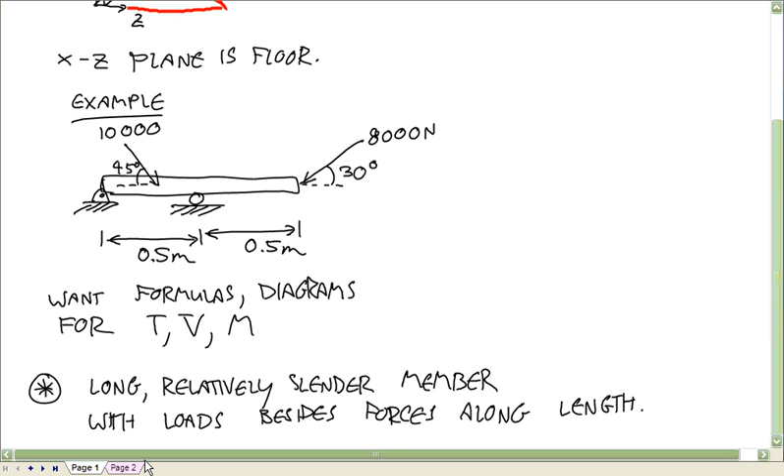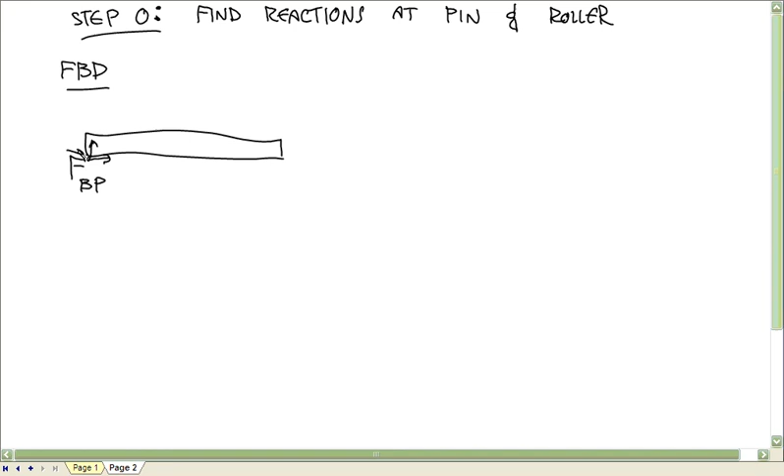Okay, so free body diagram of the beam. We'll put a force here. I'll call it force on the beam by the pin. And then there's a force here. I'll call it R. Then if you break this force into components, you get 7071, negative 7071.

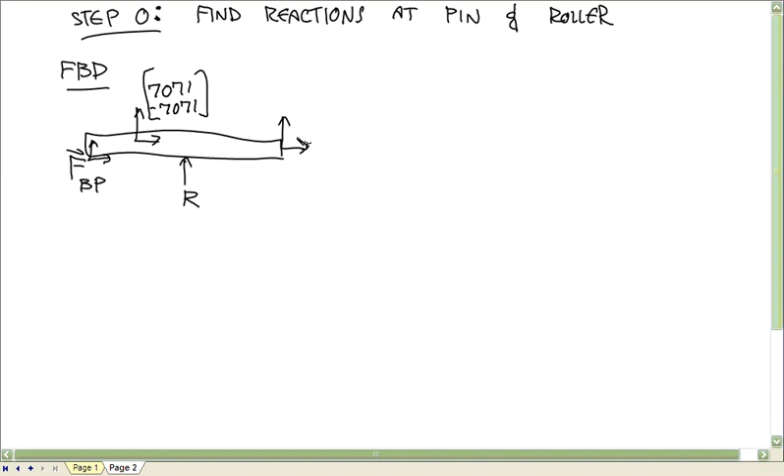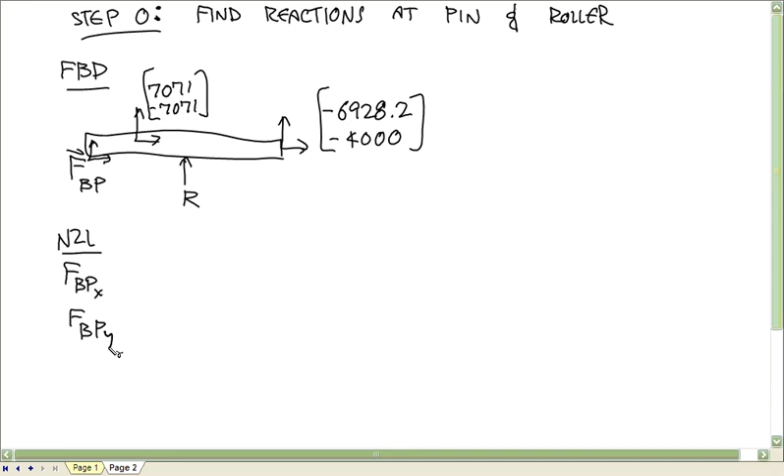And break this force into components, you get negative 6928.2, negative 4,000, right? So then Newton's second law, we have F BP x and y, plus 7071, negative 7071, plus 0, R, plus negative 6928.2, negative 4,000. That's equal to zeros.

And the rotational equation, I'll do this about the pin. So you could set up the table for this, but I think you'll find with almost all of these beam problems, calculating those moments comes out pretty simply. Since these are always straight lines, for the most part the x components are going to be acting along the line horizontal from what you're choosing as your about point. You're just going to have moments produced by those vertical forces. So writing those tables out for these beam problems and internal load problems probably won't be necessary.

So you got negative 0.25, that's the moment arm, times 7071. Well, the moment arm's 0.25. I guess I just pulled this negative out here. Really, the way you have to think about this is in terms of which way this would cause a rotation about what you choose as your about point. I chose this pin as my about point. So a downward force is going to make it rotate clockwise. And of course, when I do something clockwise to me, it looks counterclockwise to you, making everything more confusing.

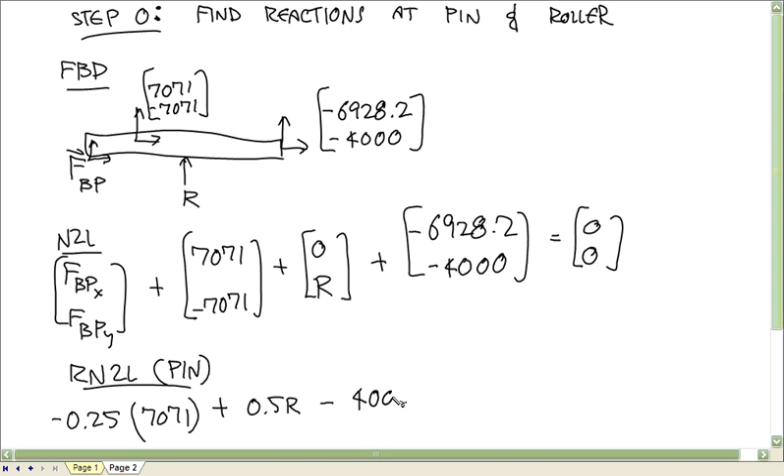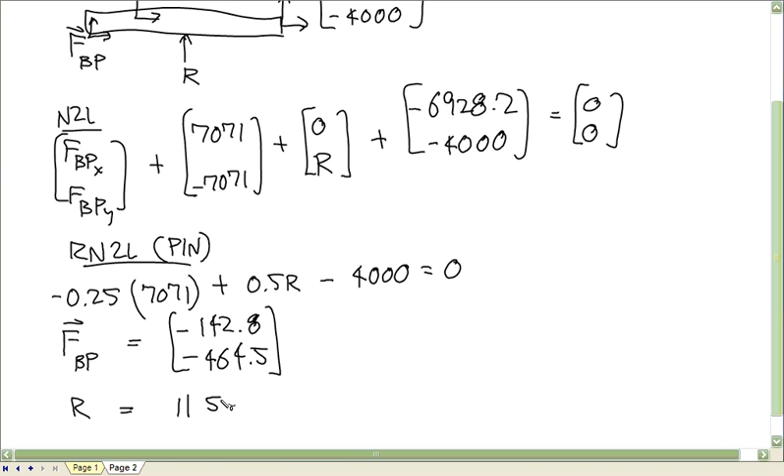And if you solve this, tell me if you got the same thing. You get F BP vector is equal to pretty small values, negative 142.8 and negative 464.5. And then that reaction at the roller is a big value, 11,535.5. What that tells you is the way I have this set up, these would almost be balanced without this thing here. You just need a little help over here at this pin to keep it from rotating, spinning.

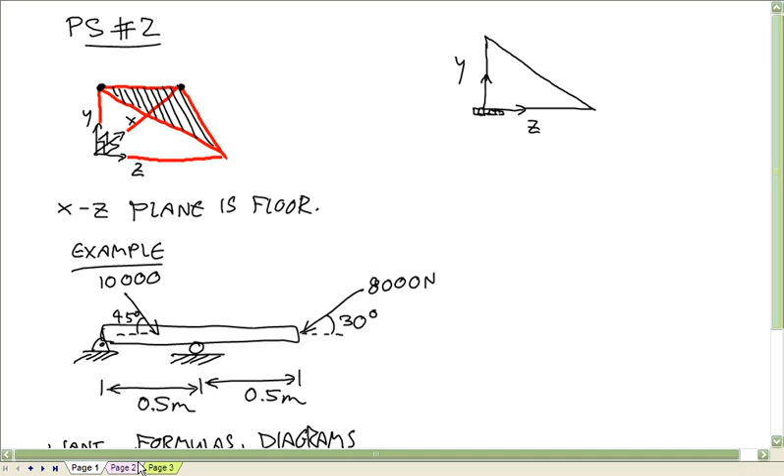Okay, the next step is we have to figure out what the important points are. So, whoops. What are those in this case? Okay, the endpoints. Yep. And then what else? Yeah, right. So one is where this applied force is, and the other one is where this roller is.

So how many cuts are we going to have to make? That's 4 important points. How many cuts? 3. Yep. We're just going to go in between every pair of important points. So one cut's going to represent the stuff from here to here, one from here to here, and one from here to here. So our important points are at 0, 0.25, 0.5, and 1.

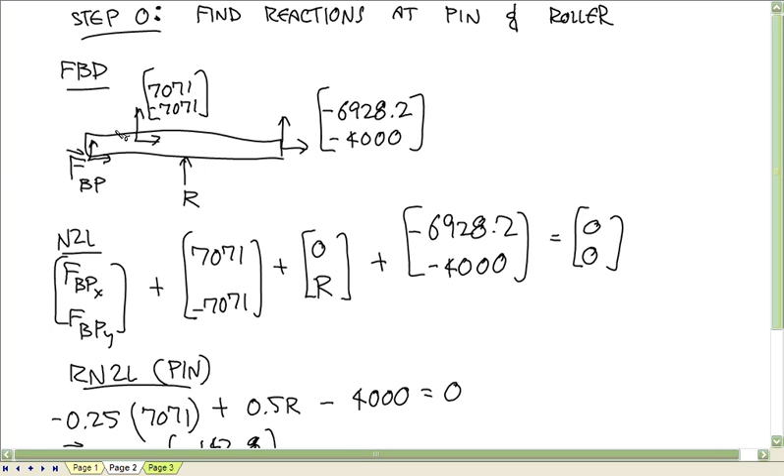Okay, so now we have to do a cut. And our first cut is going to deal with the portion that goes from x equals 0 to x equals 0.25. So x is in the interval from 0 to 0.25. So go ahead and work together on that. And when you're done, we'll do it up here.